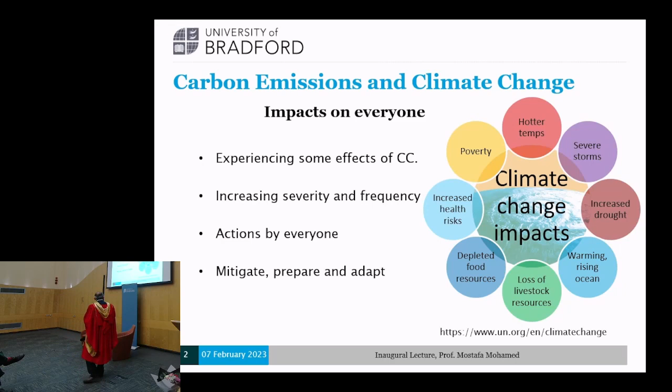Unfortunately, the construction industry itself, which we are proud of and which makes a massive difference to people's health and the prosperity of societies, is environmentally unfriendly in terms of carbon emissions. The construction industry is responsible for 30% of carbon emissions in the UK, and globally it accounts for 40% of carbon emissions.

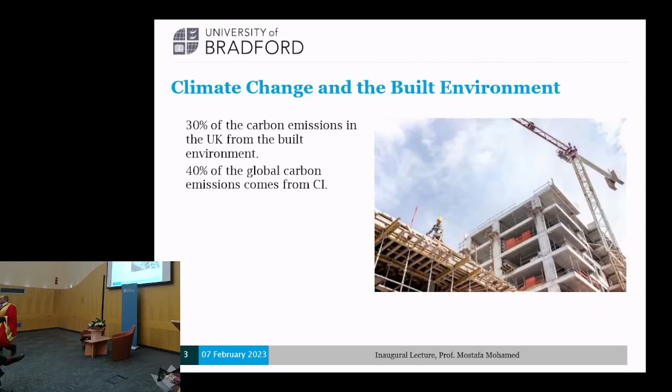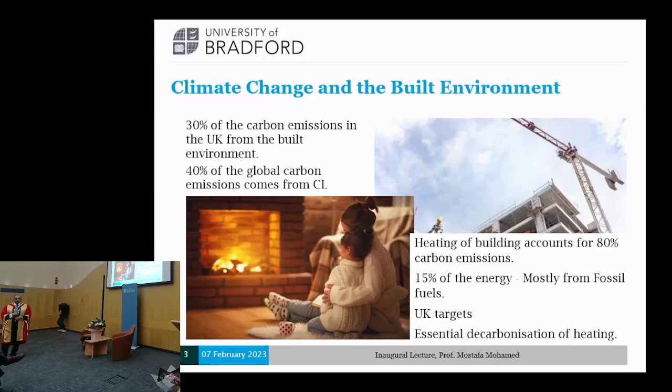It is huge. The vast majority of carbon emissions in the construction industry and the built environment come from heating our buildings. Heating of buildings accounts for 80% of carbon emissions in that sector, which is almost a quarter of the UK's total carbon emissions. It is huge, and the majority of this heating is generated from fossil fuels. So we have to act.

The UK government has set an ambitious target to reach net zero by 2050. They also have interim targets of a 78% reduction in carbon emissions by 2035 and 68% by 2030, compared to 1990 base levels.

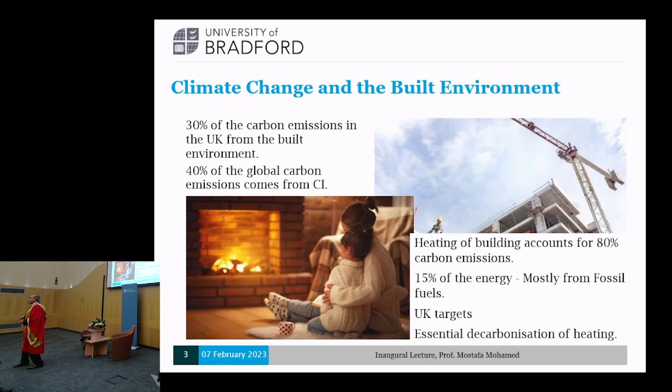So it is essential that we decarbonize our heating of buildings. We need to ensure that it comes from sustainable sources, from low carbon sources. This will require, of course, that when we construct new homes, we need to make sure that they are sustainable in terms of energy efficiency, and also, most importantly, that they use sustainable materials.

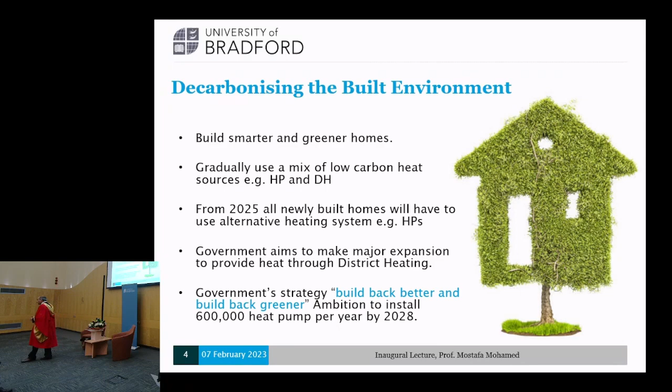But in addition, the government strategy is we have to move gradually into the use of a mix of low carbon sources, like heat pumps and district heating.

So from 2025, all new homes will have to use alternative heating systems, for example, heat pumps. And of course, the government aims to make major expansion in providing heat through district heating. Here in Bradford, they will build a new district heating system, a major one.

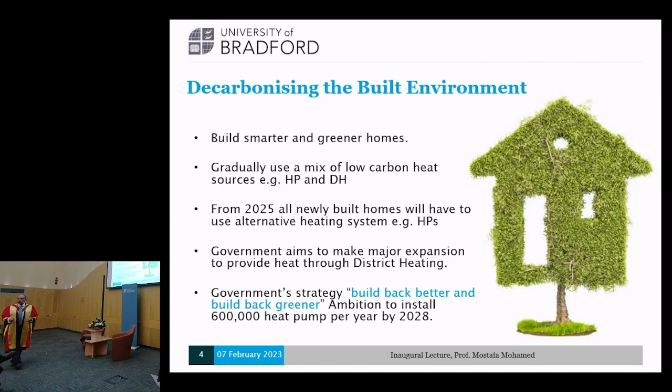So the government, I would say, aims also to install 600,000 heat pumps by 2028. It is a very ambitious target, but heat pumps are one of the renewable energy technologies. And one of them is the ground source heat pump, where I do my research.

So the ground source heat pump includes three elements: the source, which uses the ground to provide the thermal energy; the heat pump itself; and the distribution system inside the house.

The heat pump is a well-established technology. It is actually similar to refrigeration, the opposite. It is established in other European countries, it has been used. The distribution system is similar to what we are currently using in our homes.

But the research work required here is for the ground system. If we want to enhance the performance of the heat pumps, we need to develop new systems, innovative systems, and new construction materials to enhance the performance of the heat pumps.

The performance of the heat pump is, of course, defined, or we can work it out by looking at how much heat we can produce, how many kilowatts of heat, with respect to one kilowatt of electricity used to run the heat pump.

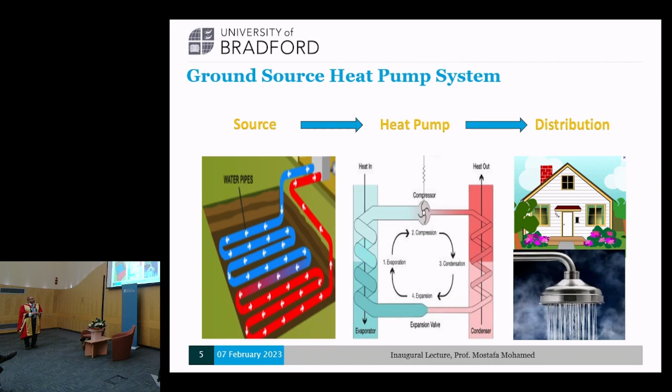So my research is focused on the ground system. And when we look at the ground system, there are different ways to connect it with the ground source heat pumps.

It could be a closed system, when we circulate the coolant from the heat pump into the ground system and back again to the heat pump. Or it could be an open system, when we try to harness heat from open sources like rivers and sewers.

It could be installed as shallow heat collectors in the ground, near the ground surface, in which case we lay horizontal pipes, or it could be deep in boreholes, in which case it becomes vertical ground heat collectors.

We can also utilize our foundations, our substructure, and our infrastructure if we can thermally activate them by embedding heat collectors inside the structure. So in fact, all our structures can be thermally activated, and we can start harnessing heat from the ground. Although it is low-grade heat, the heat pump itself will upgrade this low-grade heat and use it to provide domestic heating and hot water.

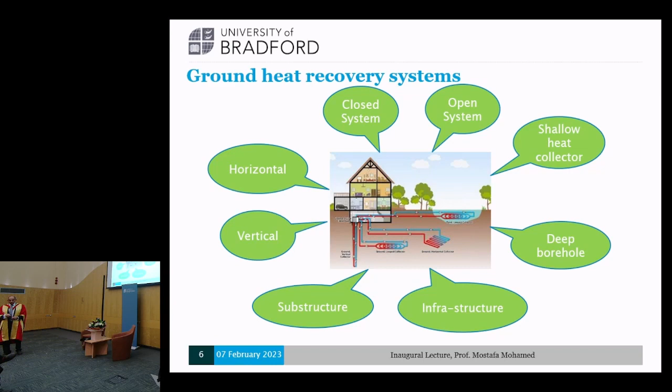So my question, which I put to myself, is: how can I enhance the performance of heat pumps? If we can ensure that we enhance the efficiency of heat pumps, then it is likely to become a cost-effective, viable option, and we can improve and enhance the uptake of the technology.

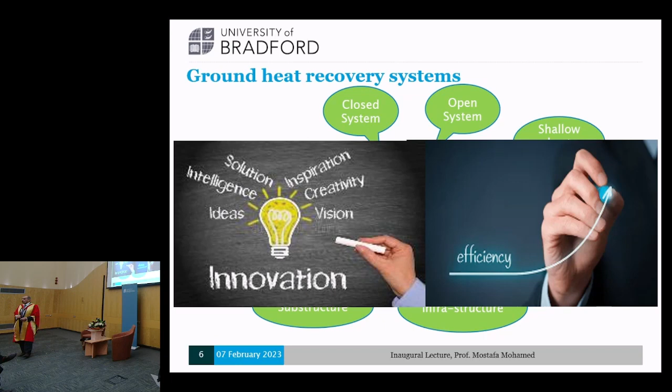So it is all about innovation, developing innovative systems so that we can improve the efficiency of heat pumps. So today, in the rest of my time for my inaugural lecture, I will take you through the research projects which I have managed, led, or contributed to regarding heat recovery from the ground.

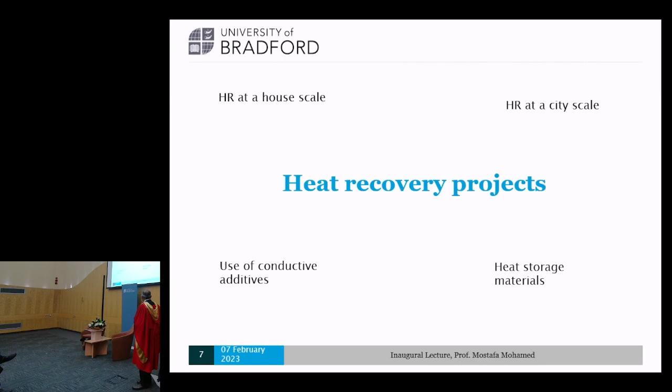I will be presenting to you heat recovery at a house scale, heat recovery at a city scale. I will also look at the use of conductive additives, how to improve the efficiency of heat transfer, and also heat storage materials. So the first two projects are part of a European funded project called INNERS.

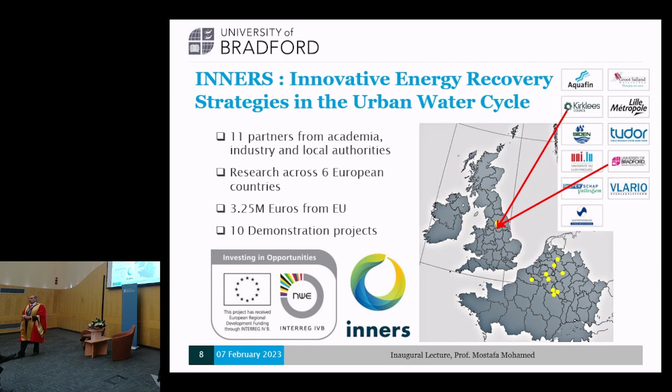This is Innovative Energy Recovery Strategies in the Urban Water Cycle. We were 11 partners from academia, industry, and local authorities, carrying out research across 6 European countries. We received €3.25 million from Europe and managed 10 demonstration projects. From the UK, we were the University of Bradford and the Kirklees Council.

We were 3 academics working on these projects: myself, Professor Simon Tate, and Dr. Alma Schellert, along with 3 research assistants and 1 PhD student, Mohammed, who is with us now. Congratulations, Mohammed started his senior lecturership at Exeter University 2 weeks ago. Well done, Mohammed.

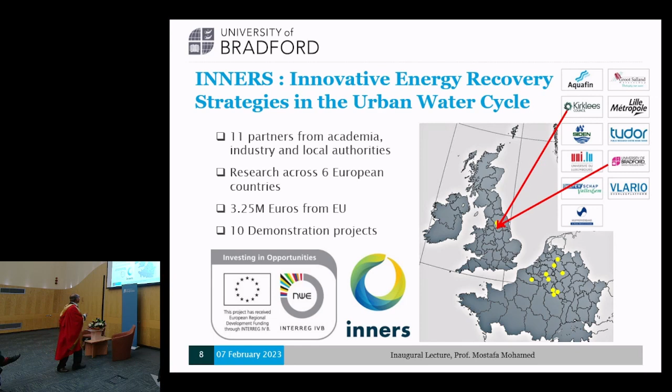We managed 2 projects at University of Bradford, one at a house scale. When we look at the urban water cycle, we start with abstraction of water - this is the storm water, which can go either to the ground or reservoirs. When treated and supplied to our homes, it is used and then drained, discharged into the sewer network. The first project aimed at looking at diverting storm water into the ground to harness the heat from it. The second project is how we can harness heat from the sewer network, because our wastewater is warm enough to extract heat from.

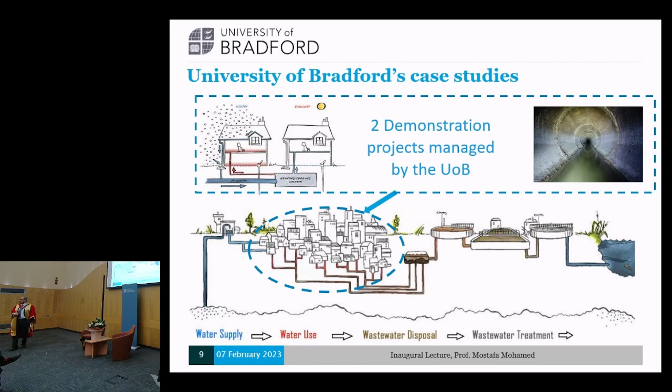So the first project: thermal energy recovery at a house scale. This is a demonstration project which we built in Dewsbury, not far from Bradford. The project aimed to reduce reliance on energy providers, reduce our carbon emissions, and reduce our wastewater or draining of water into the sewer network.

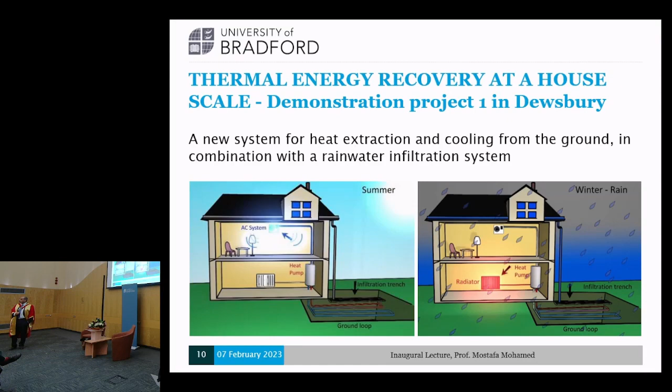We diverted storm water from the roofs into the ground, combined with ground heat collectors. The heat was harnessed from the ground and used to provide space heating and hot water. During the summer, we also combined it with a passive air conditioning system so we could harness excess heat from the bedrooms, provide cold air, and use that excess heat to charge the ground with thermal energy - so we heat the ground using heat from the rooms.

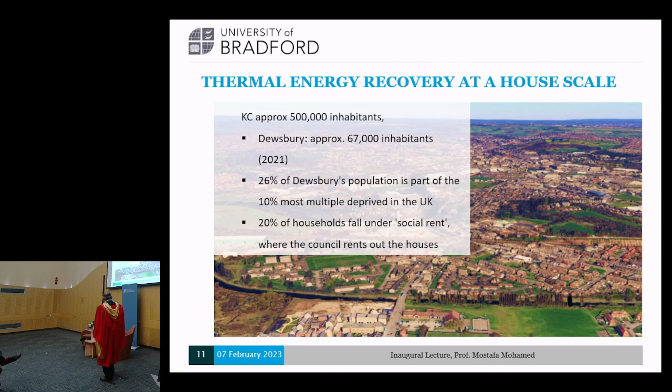For the Dewsbury project, we were allocated 4 new houses for new development. Each house is 150 square meters, with 3 floors, 4 bedrooms, a front garden of 30 square meters, and a back garden of 45 square meters. This presented the first challenge in this project: the small garden area wasn't enough. Our shallow ground heat collectors generally require a larger area to ensure we harness enough heat for the buildings.

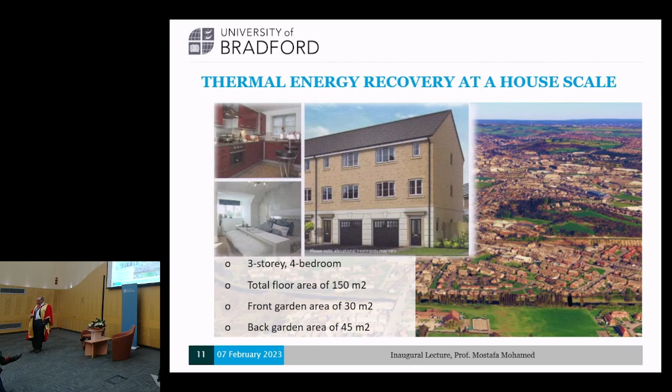So we had to come up with a new design for the ground heat collectors - we developed compact heat collectors that could be built into the houses. For the 4 houses, one was a control house equipped with a normal gas boiler. The other 3 houses had 3 new systems installed: one with a single ground heat collector, and the other 2 with double ground heat panels. Rainwater was diverted to the ground in 2 houses so we could assess the improvements it makes.

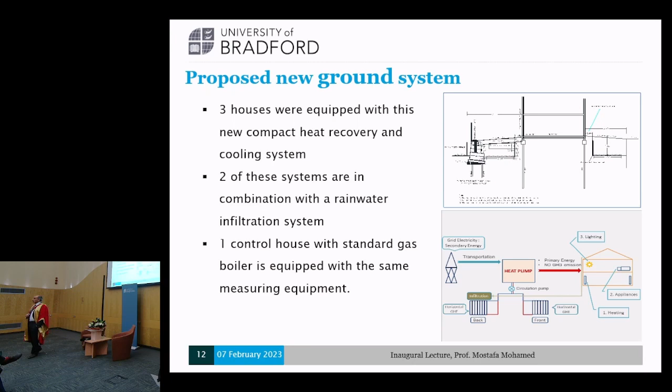The second challenge we faced in this project was the ground condition. Once the houses were assigned to us, we looked at the geotechnical report - the top ground was actually made ground, made out of ceramic pieces, bricks, rocks, and all sorts of things in a clay silty matrix. This wasn't appropriate at all for our ground heat collectors, so we undertook very comprehensive laboratory experiments to find a replacement soil.

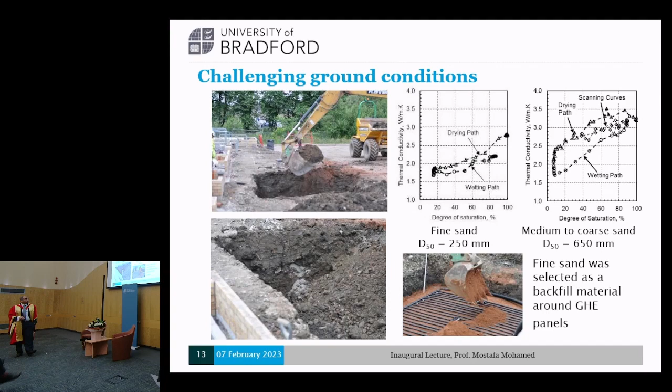The system was built on site. We have been managing and overseeing the work on site, and of course we replaced the ground soil with sand, fine sand, which was placed in appropriately and controlled way. In all 3 houses, we used 350 meters of pipes in the system, so this was a control.

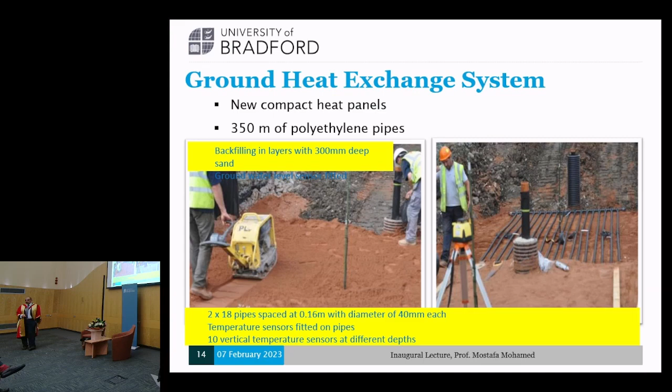In addition, while installing the system, we built a very comprehensive monitoring system because we wanted to assess our designs and make sure we could assess the performance of the new systems.

For each of the houses, we had 135 sensors in the ground, in the heat panels, to check the temperature in the heat panel. Also for groundwater, to look at groundwater level and ground temperature. Internally, on each of the floors, we built sensors to measure the temperature and humidity inside the house. And externally, we measured ambient temperature as well as the energy usage.

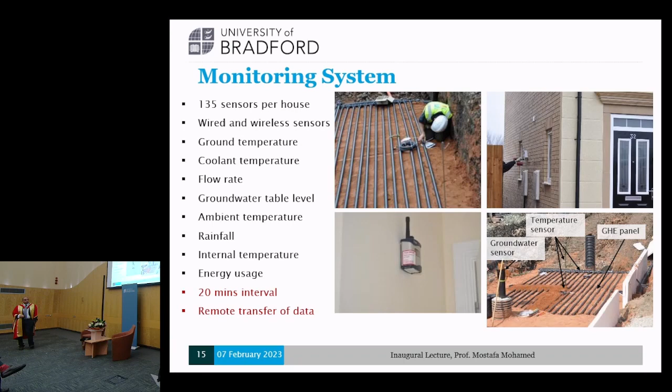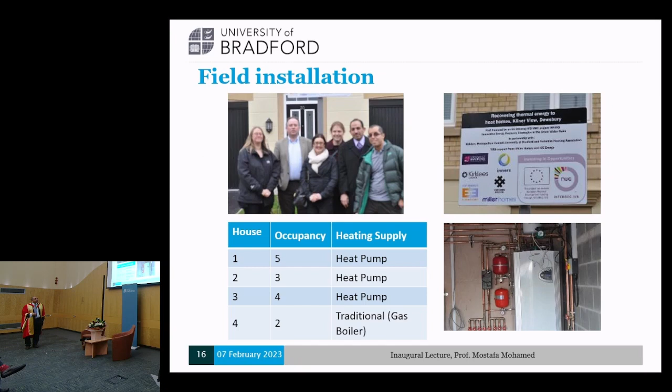It took 5 months. We built the system, and we were all very happy - Mohammed, myself, Alma, Simon, and colleagues from Kirklees Council, Leanne and Alison. By the summer, all systems were completed, and we had 4 houses: 1 control and 3 with heat pumps, but with different occupancy.

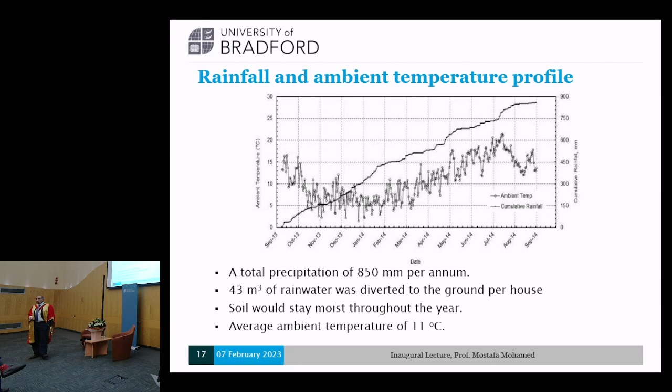In terms of results, we monitored the house for 1 full year, and it came as we expected in terms of rain. In this year, we had 850 millimeters of precipitation, so we managed to divert 43 cubic meters of rainwater to the ground. This ensured the ground is moist, which helped with heat transfer, as I will explain later, and also diverted this water from the sewer network, reducing the load on the sewer network and the cost of treatment.

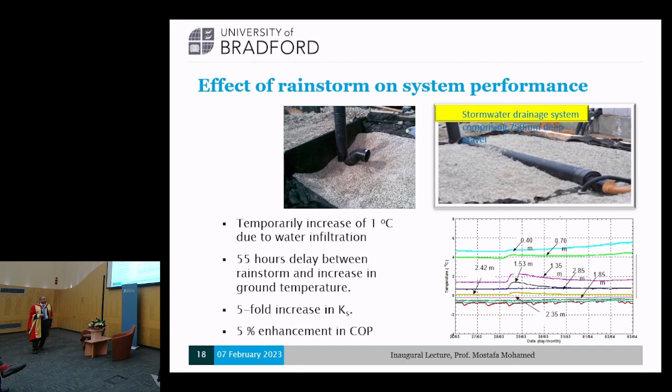In terms of the effect of rainstorms on system performance, we looked at one of the rainstorms in March. The rain had temporarily increased the temperature in the ground by 1 degree. However, there was a delay of 55 hours between the time of the event and when the water caused an effect in the ground. Diverting into the ground resulted in a 5% enhancement to the coefficient of performance.

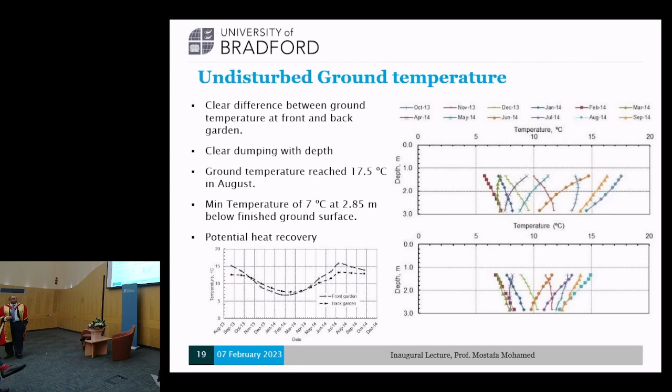Regarding the effect of the infiltration trench diverting rainwater, it was very clear from the data that the heat panel can in fact harness the heat quicker and faster, which provides better efficiency. So diverting the rainwater into the ground did work - it did assist with heat recovery.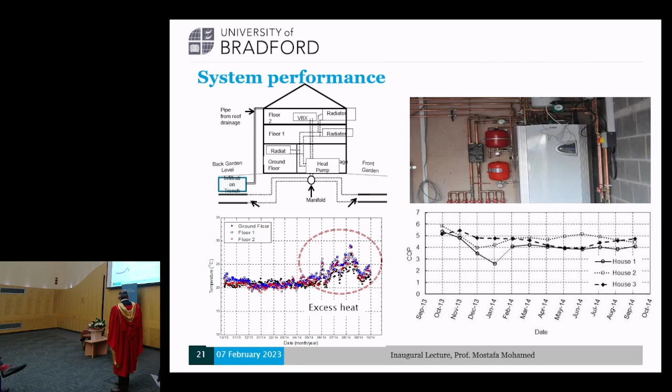In terms of carbon emissions, this is very important as well. When we installed the system, we were aiming to reduce carbon emissions, so we analyzed the energy usage of electricity and gas. We reduced total energy consumption because we moved from gas to electricity. However, when we worked out the carbon emissions for each system, all four houses were neutral.

This is because at the time, our electricity generation was mainly from coal, oil, and gas. So the carbon emissions of electricity generation got passed onto the heat pump, and hence the system did not make any saving in terms of carbon emissions.

Having said that, when we look at the data now for 2021 and use it to predict, we realize that we are making a 40% reduction in carbon emissions. So this proves that ground source heat pumps are one of the technologies that work and reduce our carbon emissions.

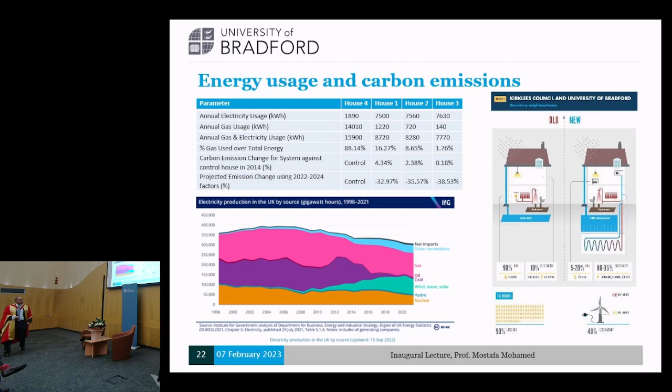So this is my first project. The second project which I would like to talk about is modeling the viability of heat recovery at a city scale. This was also part of INNERS project, and in this project we partnered with Aquafin, the water company in Belgium, in Antwerp.

At the beginning of the project, we were invited to visit the sewers. It is a unique opportunity - not many get the chance to go down into a sewer pipe. But it was exciting for me, with Simon and Mohammed here as well. When we went to the sewers, we saw how the water comes out of the houses and is collected in the sewer pipe with everything within it. It was a good opportunity, I would say - I don't know, maybe it's once in a lifetime, you never know.

Our aim is to look at opportunities to recover heat from the city of Antwerp, identify locations, and optimize the heat recovery. So we agreed with Aquafin to run a field measurement campaign so that our model is unique and validated. Alongside the field measurements, we developed a single pipe model, which we will use later on to develop the sewer network model of 3,000 pipes. Then we created scenarios to look at heat recovery during different seasons within the year.

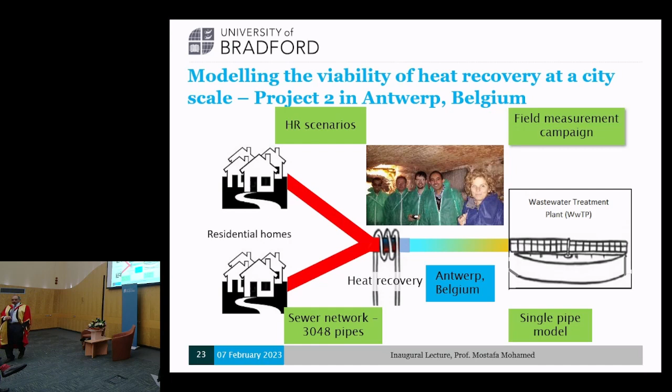So 7 sites were selected in Antwerp. Antwerp itself is similar in population to Bradford, again 500,000 inhabitants. We have 3 sites for soil temperature, where we measured the ground temperature down to 4 meters - this is the zone where the sewer network lies.

And also we had 2 sites for measuring the in-sewer air and wastewater temperature, and also the hydraulic flow rate - 2 sites in urban areas and 2 sites near the wastewater treatment plant. So this is large sewers.

The data which we captured was very unique - you wouldn't see much data like this in the technical literature. But a few observations to make: near houses we probably experience less flow in the sewer pipes. This is one of the urban sewers - it was around 28 meters cubed per hour.

The ground temperature was quite less than the wastewater temperature, which indicated that there is temperature loss going from the in-sewer water to the surrounding soil. When we looked at upstream and downstream temperature, based on the analysis, there was almost around 4 degrees drop per kilometer on average over the whole year for urban sewers. So there is temperature in the ground, but it is lost to the surroundings.

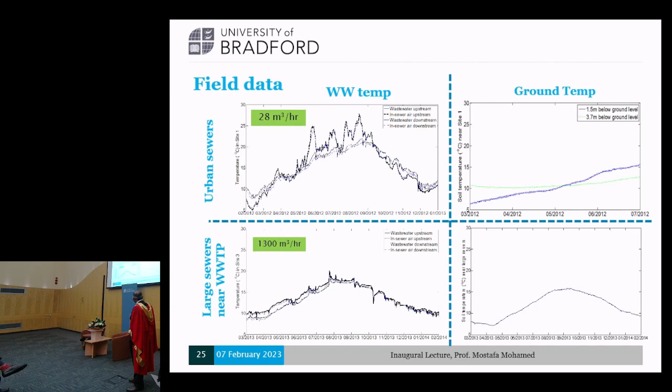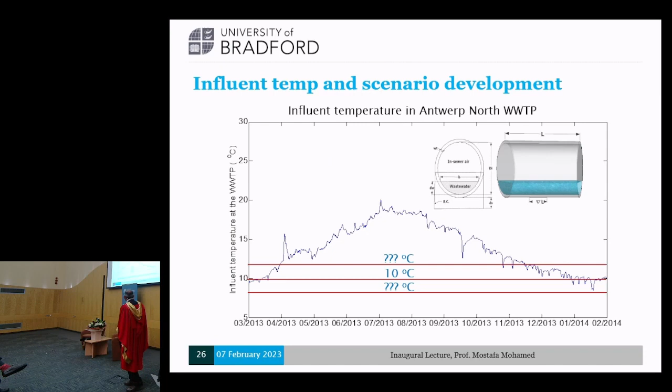When we considered the large sewers, the ground temperature was more or less balancing with the wastewater temperature, which suggests there is some equilibrium happening between groundwater, soil temperature, and wastewater temperature. The temperature at the wastewater treatment plant varies between 9.5 degrees to 21 degrees. This is exactly the amount of heat which we can harness. We can set the minimum based on the water treatment plant requirement, but there is plenty of heat which we can recover.

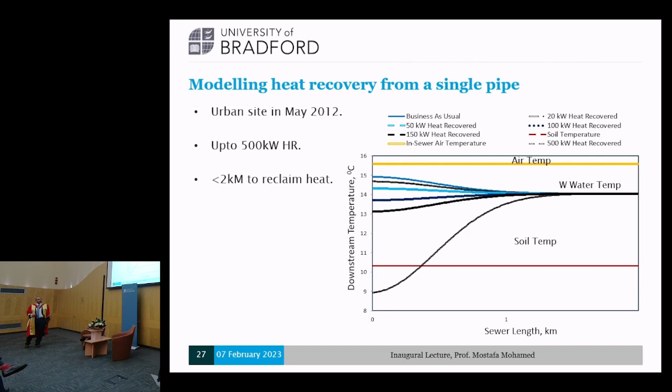I'm presenting here today just a couple of examples from a single pipe, where we try to look at different scenarios for recovering heat from 20 kilowatts up to 500 kilowatts. This is in May, where it is warm weather, and it proves that we can recover this heat from the urban sewer pipe, and we can reclaim this heat within 2 kilometers of the pipe. If we try to recover more heat, I think we will need longer pipes to work with.

The second scenario we considered for the whole city. We considered part of Antwerp with 80,000 inhabitants, and we looked at different scenarios for wastewater, how we can recover heat. In this case, we considered recovering 200 kilowatts from each pipe. So out of the 3,000 pipes, there were 288 pipes that can provide a minimum flow of 25 liters per second.

We set the boundaries, the limits, that the temperature at the wastewater treatment plant doesn't go below 9 degrees, and also in any of the sewer pipes doesn't go below 5 degrees. This gives us an indication that there are only 133 viable options from which we can recover heat throughout the whole year, totaling around 207 megawatt-hours per day.

This is equivalent to providing heat for almost 4,000 homes. So just considering this catchment of 3,000 pipes, we should be able to recover heat and provide space heating and domestic hot water for almost 4,000 homes. Of course, if we consider January, it will be half this amount because, generally speaking, the temperature is low. But the maximum in a day was 13.4 megawatt-hours, obtained between 10 and 11 o'clock in the morning.

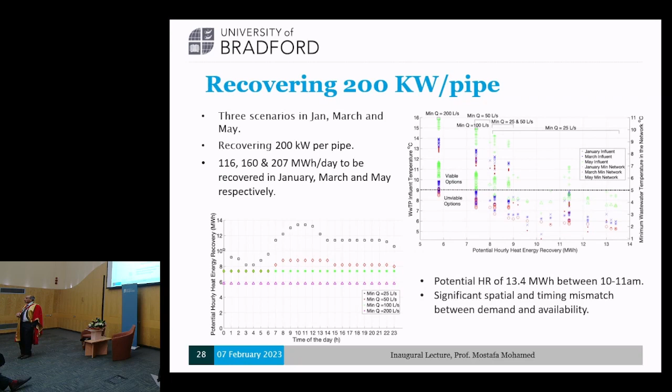So this data gives us two conclusions. The first is that when we need to recover heat, we can recover it from the large sewers, which are not near homes, so there is a spatial mismatch. The second is the timing mismatch—we can recover heat at a time when we don't need it.

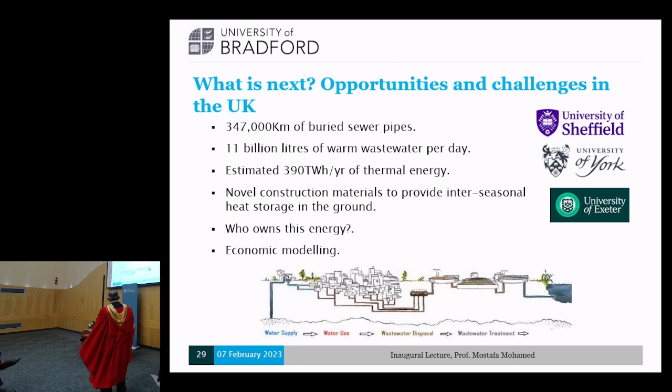So what's next? We'll try to apply it in the UK. In the UK, we have 347,000 kilometers of sewer pipes, which transport 11 billion liters of warm wastewater. It is estimated that we can recover 390 trillion watt-hours per year of thermal energy.

So we are looking at developing novel construction materials to provide inter-seasonal heat storage in the ground. This work is with Sheffield University, York, and Exeter, and will be submitted shortly.

Part of the project looks at who owns this thermal energy. It is heated by ourselves—we pay for the heating, and we discharge it into the sewer network. So who owns it? We also need economic modeling to ensure there's revenue and that we can convince people to take up the technology.

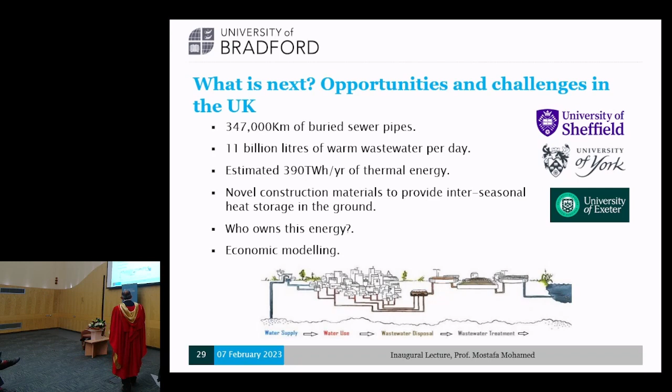So it is very interesting, and this is my next step in terms of work related to the first two projects.

Then I'm also working on enhancing the performance of heat recovery using thermally activated structures. Thermally activated structures, as I mentioned earlier, could be foundations for our homes, retaining walls, slabs, or even infrastructure like tunnels. So any embedded or buried structure in the ground can be activated to harness heat from the soil.

This work on the utilization of thermally activated structures started probably about three decades ago. Researchers have looked at optimization in terms of ground heat collectors, coolant, and configuration. There is a lot of research work, but when we look at how heat transfers...

Heat goes from the coolant to the pipe, to the concrete, to the soil. There is heat transfer through different materials, and there's a possibility that if we can enhance the thermal properties of these materials, we can improve the efficiency of the system. So my work here looks at how we can change the properties of materials to enhance heat recovery from the ground.

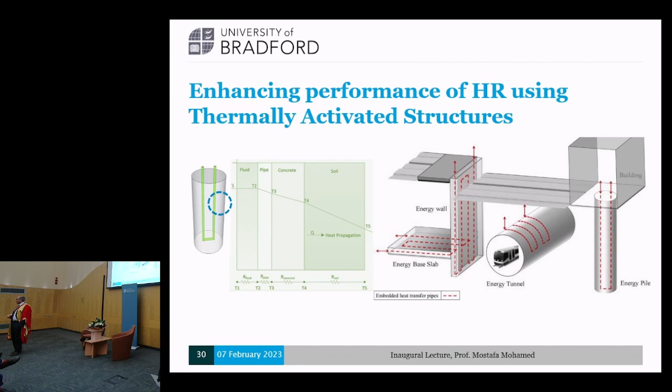I'm looking at two different areas: conductive additives, and heat storage materials. With conductive additives, we're looking at thermally enhanced concrete and thermally enhanced soil, applied in geoenergy piles and geoenergy walls. With heat storage materials, we've developed a new PCM ground heat exchanger, and the novel construction materials are underway.

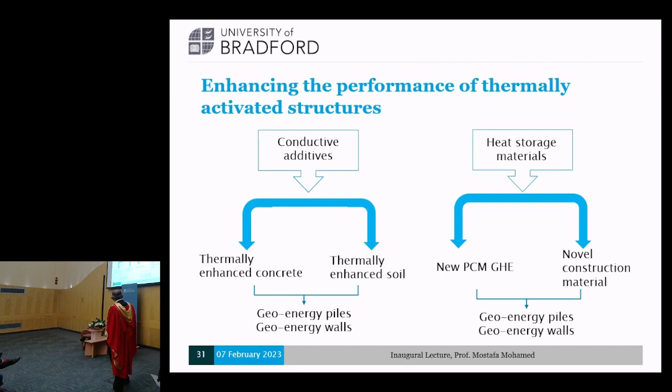So I built a fully instrumented testing rig in the lab for testing pile foundations—model piles and model walls. Everything is captured in terms of temperatures, flow, and so on. We can control the groundwater level, the water table, inside the tank, so we can simulate different situations.

From this experimental work, we want to develop effective concrete using conductive additives. We need to optimize the enhancement of the soil and assess the impact of heat storage.

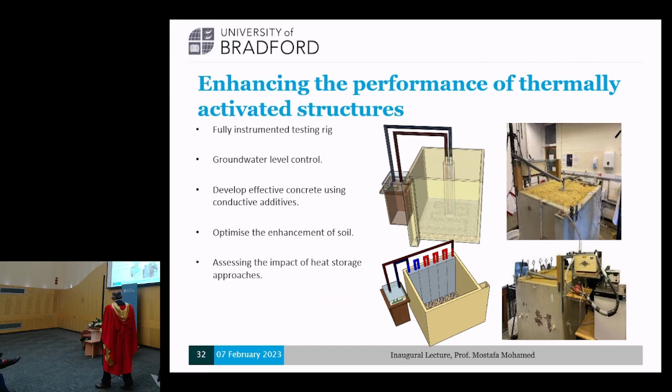So when it comes to thermally enhanced concrete, the first task is: can we enhance the thermal behavior without affecting the strength of the concrete? We looked at optimizing the thermal properties as well as the compressive strength, and found that adding conductive additives like graphite makes a significant contribution to strength, up to 45%, without adverse impact, while we can double the thermal conductivity. So 36% came as the optimum.

We prepared the sample and looked at the stiffness of the concrete as well, because in thermally activated structures, the structure has two functions: the mechanical load and the thermal load. So we need to ensure both are satisfied. The stiffness is enhanced as well as the thermally enhanced concrete, and it showed better performance in terms of thermal expansion.

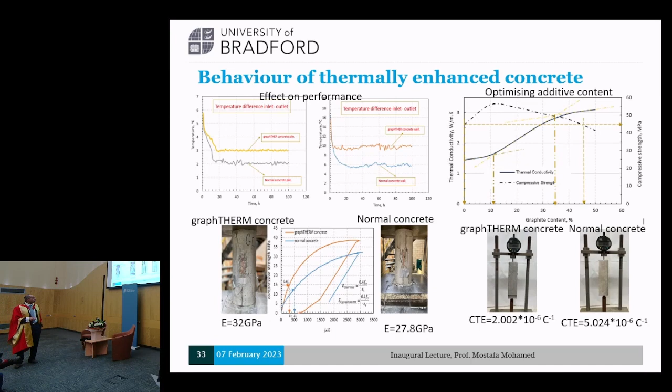When we looked at performance for piles and walls, performance improved by 50% for piles and 67% for walls. When we enhanced the concrete, we were able to increase the heat flux from the structure to the surrounding soil, and as a result the ground engaged better with the thermally activated structure. The temperature in the ground for all thermally activated structures was higher than standard concrete, proving that a bigger zone can interact with it, so we can harness heat from a larger zone.

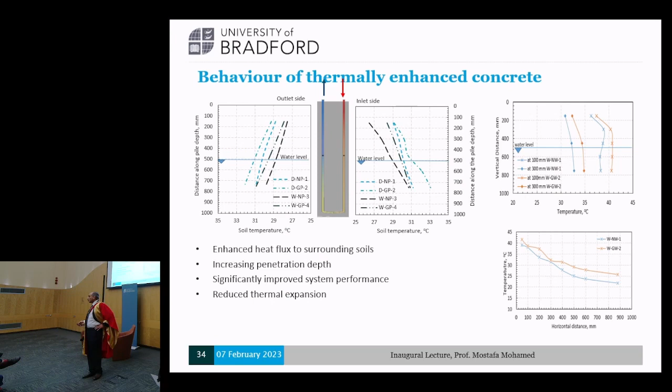The second project, we looked at thermally enhanced soil, considering adding conductive additives to the soil adjacent to the structure. It was very important to find out the appropriate zone around the structure, so we undertook experimental testing to optimize the zone. From these experiments, we worked out that adding conductive additive to the soil within 25% of the interaction zone should be good enough to transfer the heat.

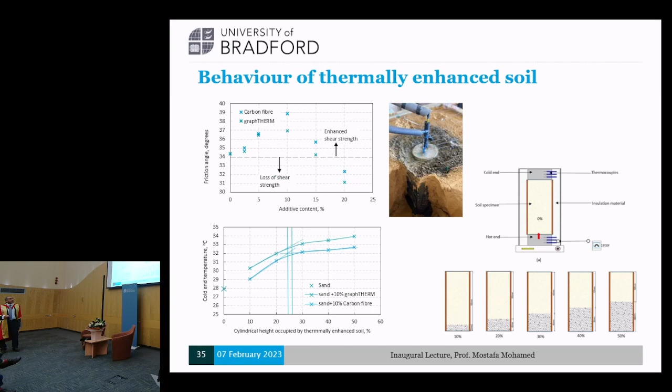It was also important, since we are talking about soil, to look at the shear strength parameters - how the mechanical load of the soil behaves. It proved that resistance to failure can be improved with the addition of conductive additives up to 15%, but 10% was the optimum. In terms of performance, the thermal properties of the thermally enhanced soil more than doubled.

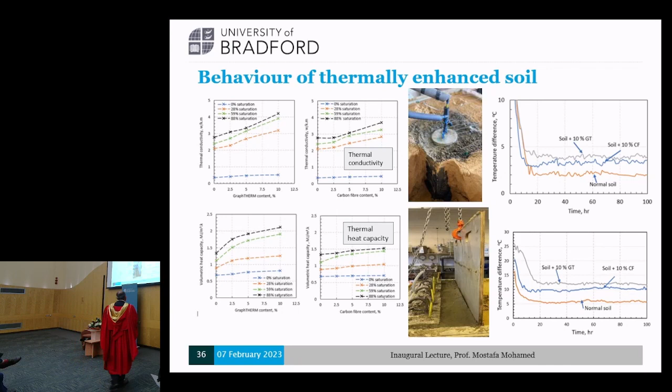In terms of system performance, the amount of heat we were able to harness from the ground increased by almost 30% in the case of piles with thermally activated soil, enhanced soil. The optimum value is 10% conductive additives. It was effective enough to enhance the thermal properties of the soil, and enhancement of 80% was achieved for the piles, and 100% for the walls.

In terms of the soil, we always have a problem with these structures: the contact thermal resistance. In this case, by enhancing the soil adjacent to the structure, we proved that the soil temperature is more or less exactly the same as when we added the graphite to the structure. So it was important to realize that enhancing the soil adjacent to the structure improves the heat transfer from the structure to the surrounding soil, and also gives better performance in terms of engaging more soil, enlarging the zone we can harness from.

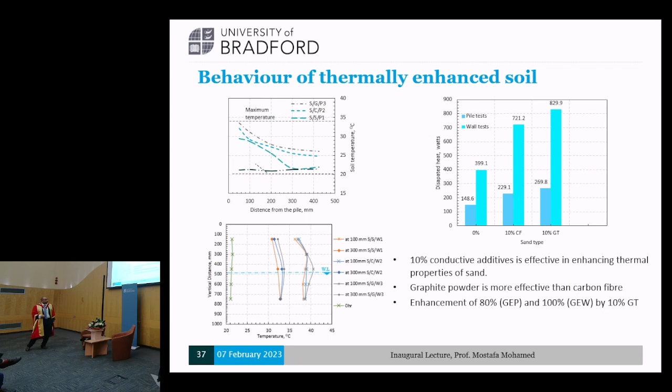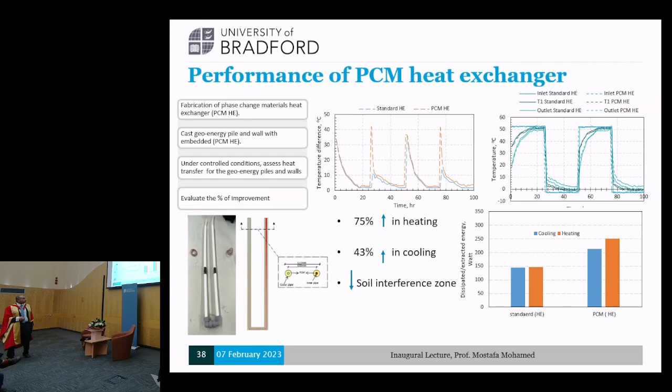This is another project we worked on: developing a PCM heat exchanger. In this case, we use heat storage around the heat exchanger and looked at the performance of the system under cyclic loading, heating and cooling. It proves that when we use heat storage material encapsulated around the heat exchanger, there is a significant improvement of almost 75% in heating and 43% in cooling. In addition, when we use thermally storage material inside our piles - our thermally activated structure - we reduce the soil interference because we can store the heat and also harness it.

In terms of walls, this is again similar performance, but less. We used a different heat storage material in this project, and the performance for the walls was 43% improvement in heating and 32% in cooling. The interaction of the soil zone here was much less in terms of heat transfer in soils.

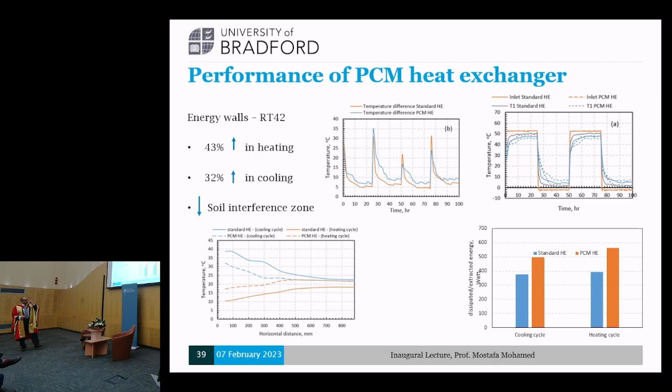The last one, which I'm really proud of and think has significant development potential, is developing novel PCM aggregates where we can store and release heat from the aggregates.

We are currently undertaking experimentation using lightweight aggregates, and also man-made and natural vascular aggregates, trying to impregnate them with phase change material so we can use them in construction, in the ground, and in structures. Some work has been done, but it hasn't been successful.

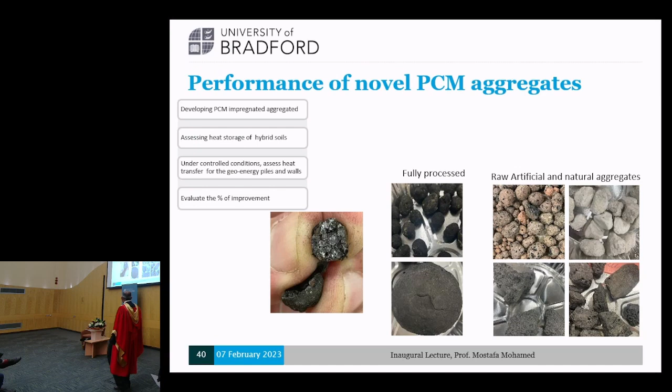So far we have been successful in saturating the aggregates with the PCM and sealing it properly. We've carried out investigations, and from what we've done we've seen significant improvement in terms of specific heat, the amount of heat we can store and release from the ground.

Since these materials will be used as construction materials, it's important we look at the mechanical behavior as well as the thermal behavior. Mechanically, there is improvement in terms of the mechanical behavior.

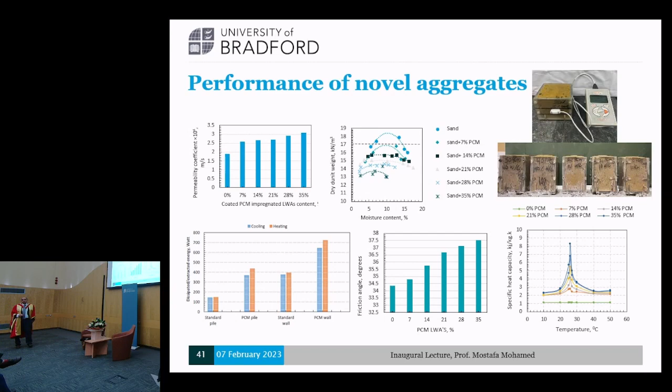In terms of density and permeability, flow of water was quite less because the material itself is lighter, but it improved the permeability coefficient. In terms of efficiency, there was significant enhancement from our trial tests, and in the performance of the pile and the walls.

So what's next for me is upscaling the process. We want to deploy this novel construction material into different structures, so we're looking at upscaling the material and optimizing the system performance based on coupling conductive additives as well as heat storage materials.

We want to run full-scale tests to prove the concept of the work, and I want to investigate thermal cycling as well, because if we have these heat storage materials in the ground and in the structures, we need to make sure it's stable for the lifetime of the structure. So it's important we deploy the novel aggregates to real projects.

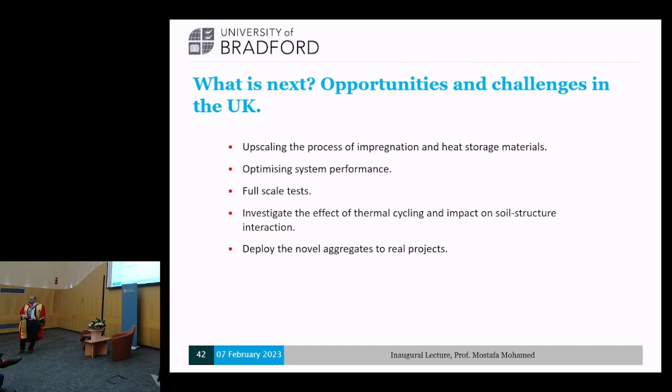So this is what I would like to cover, but before I finish, I'd like to acknowledge the hard work of all my PhD students who completed with me, in particular Mohammed for this project. I have 3 themes, as Shirley mentioned earlier: thermal recovery, stabilization of soils using waste materials, and soil structure interactions. I'd like to acknowledge the work of my completed and current PhD students - Omar, Abu Bakr who contributed to the project, and Mohammed who is working and developing this area.

Thank you for listening. I hope you enjoyed the time, and I'm happy to take any questions.

Thank you, Mostafa. An excellent talk. Thank you very much. Thank you, Martin.